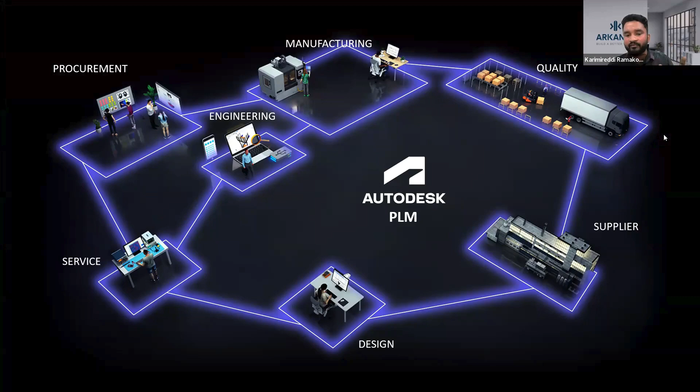These are the main and most advanced capabilities of Autodesk PLM: BOM management and change management, new product introduction and quality management, supply chain management, and design collaboration, design review, and data management. In the next slides I will explain each capability in depth and show you the interface and how it integrates with your CAD system.

So connected product development is a centralized, central source of product data. It's open and extendable, a completely cloud-based solution. You can access it anywhere, and it's all subscription-based. It's a completely web application, cloud-based, with configurable tenants, because in PLM there are different licenses for users, which we call tenants, software as a service, on trusted Autodesk frameworks.

So previously, it was Fusion 360 managed extension plus with Upchain. Now it's cloud, and we call it Fusion Manage, Fusion 360 Manage. So before going further, I will show you what capabilities are there, how it works, and how the interface looks.

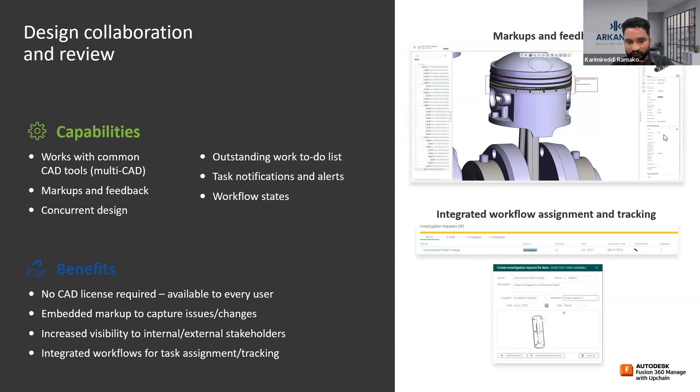So this provides an integrated workflow for task assignments and tracking. In PLM, we have task management configuration where you can give tasks to your users and easily track them.

Data management, so multi-CAD integration. As I told you, Fusion 360 Manage with Upchain. The Upchain will integrate with all Autodesk software, Inventor and all. Multi-CAD integration, here automatically the part number will come.

We don't need to hamper user work and all. So when you insert the part, automatically the part number will come. And revision control and version control is also automated in Fusion PLM. And automated document translations, permissions, and access control.

As I told you, tenants. It's configurable, it's customizable, easily we can create users and the set of permissions we can customize within the PLM. So which level of permissions, which level of access we need to give a particular user or particular team - this level of permissions and access control we can easily customize or configure in PLM.

Benefits: data integrity management like all CAD files, structure, related items, everything, and secure and controlled data management. And there is one more - if you are currently using any data management software like Vault, PLM has the capability to integrate with your data management software also.

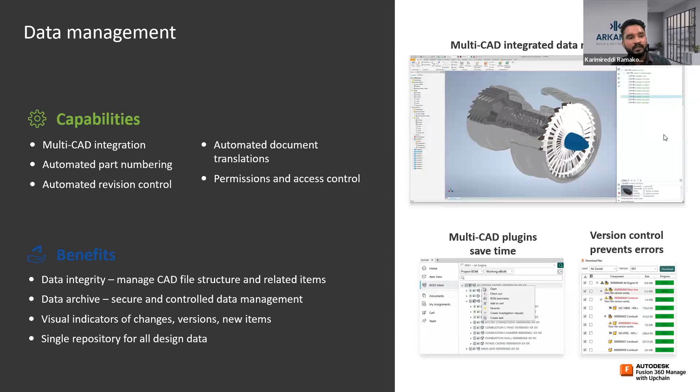And here, data management - if you have any data management software like Vault, if you are currently using Vault, the Fusion Manage extension can integrate with your data management software.

This is the main capability, BOM management in PLM - items and bill of materials management with lifecycle control. Easily you can create items and bill of materials, and configurable actual bill of material views. If you want a particular bill of material view, if you want to add more properties, if you want to extract and view particular bill of material views, easily you can configure.

It's configurable - by default there are almost 10 plus bill of materials views. And if you want to configure new views also, easily we can configure. Integrated visualization - if you want to see part visualization, file visualizations and all, easily in PLM, Fusion Manage extension like Upchain, you can view it. And bill of materials roll-ups and revision effectivity. These are the capabilities you get in BOM management.

Benefits: reduce errors, you don't need to rework. You don't need scrap work and all - you can eliminate that. Easily compare changes to ensure accuracy, and improve reuse and design decisions. You don't need to reuse manually because there's a copy design option also, so you can easily copy the complete design and the materials also. Multiple views to enable clear and concise information based on the role.

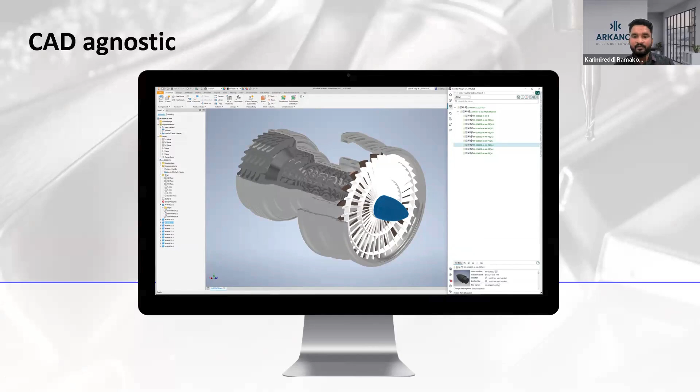Upchain has the capability to directly integrate with Inventor - directly it will integrate. Everyone can see the same data. You can easily see the visualization without any license for that. You don't need a license to see the visualization files. If you want to open that particular file, you don't need a license for that - easily you can open it.

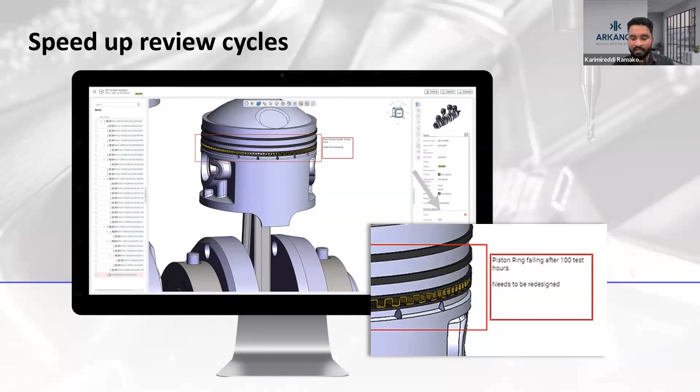This speeds up review cycles. For reviews or approvals, you don't need to send a mail - within PLM only you can review the files and give approval for them. If you want to give any comments, take a snapshot, or give remarks, these things can all be managed within PLM only. You don't need mails, you don't need to download or attach files - all this can be eliminated in PLM and managed through PLM only.

For visualization, if you want to see attached files, without opening that file in the particular CAD software, within PLM only you can view the visualization. There is a dashboard for file visualizations where you can see multiple visualization files.

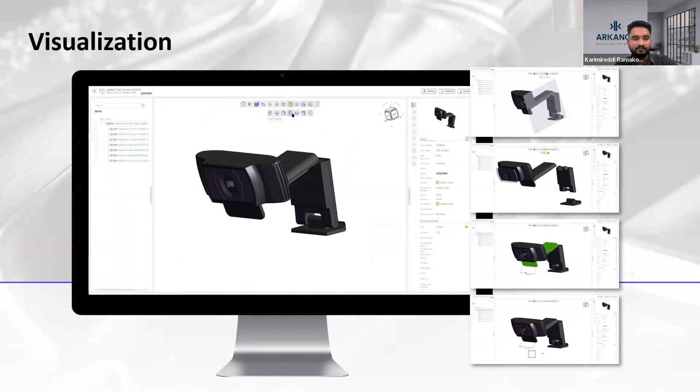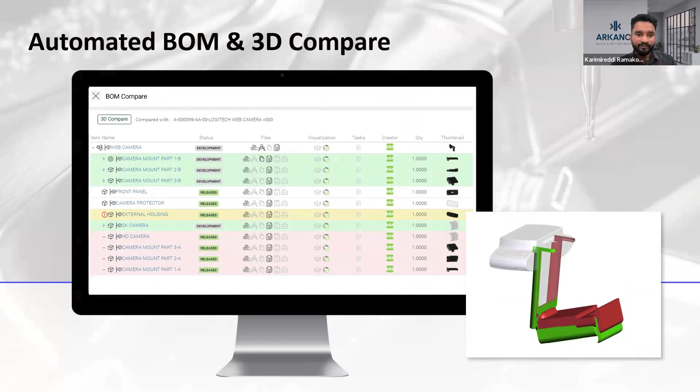And here, where you can do RFQs and all is in the PLM - only you can submit RFQs to your vendors and suppliers. So here you can add and involve your suppliers within the PLM, centrally.

So your suppliers get notifications whenever changes happen or prices are managed. If your supplier wants to accept or reject the RFQs, this level of RFQ management is handled within PLM only.

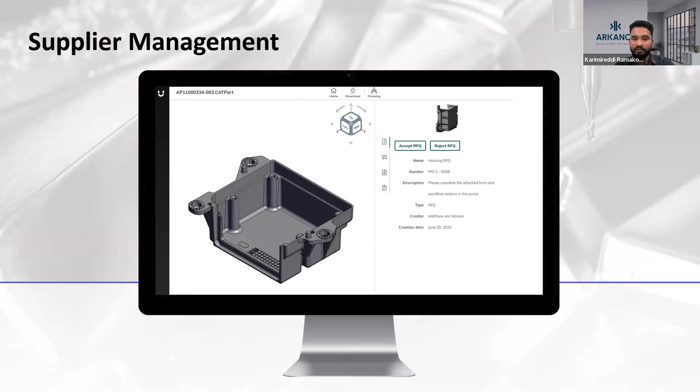Yeah, these are the main capabilities you will get from Autodesk PLM. Now we will go over how many types of licenses there are. So one is Enterprise, Professional, Standard and Participant. We can start with Enterprise.

It's the Professional capabilities plus third party integrations like third party users in Fusion 360 Manage, and you will get 300 GB of cloud data storage, and also an Upchain sandbox.

In Professional, multi-CAD product development - Professional can integrate data management and desktop plugins, CAD plugins like Inventor, AutoCAD, Fusion 360. So these desktop plugins you will get. And workplace setup and administration.

Yes, there will be administration setup where you can configure your teams, configure your users and projects and everything. So here you will get 30 GB of cloud data storage.